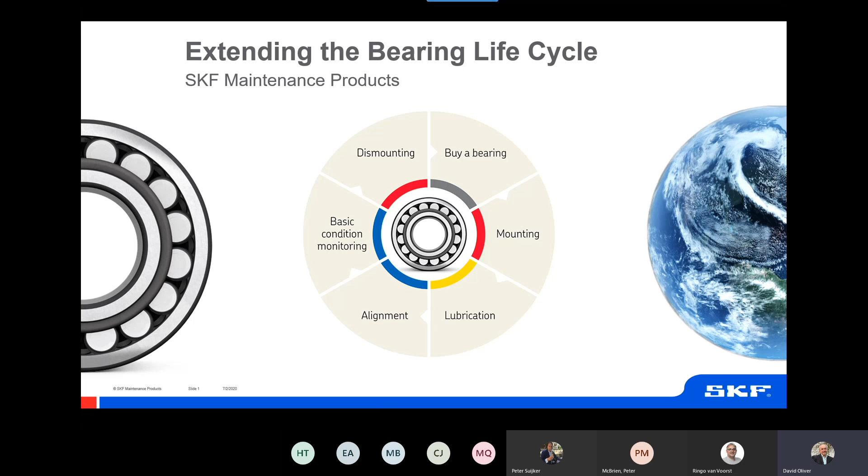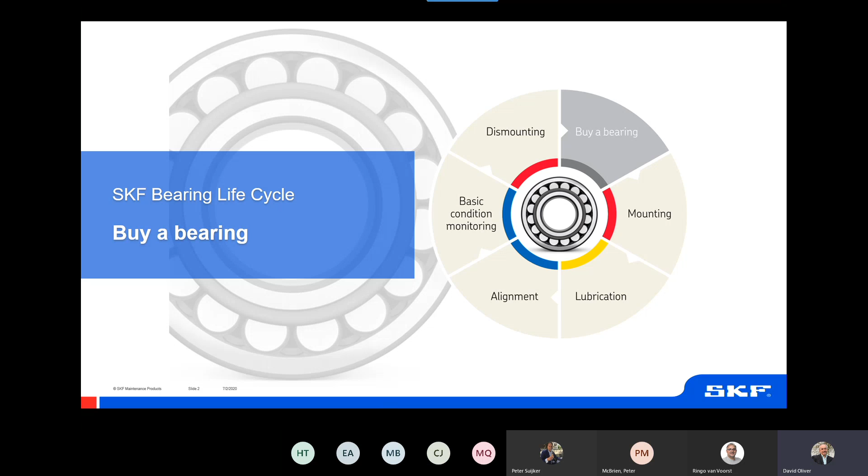So without further ado, we'll begin the presentation today and take you through the various facets which we have put together relating to the life cycle of a bearing. We'll start off with the actual purchasing of the bearing, the buying of the bearing, and you might say, well, that's a very straightforward operation. We go to a distributor, we tell them the bearing we want, and we purchase it.

But today, that is fraught with some difficulties, as some of you might well understand, because we have many issues across our range of products with counterfeit. And we want to draw your attention to this because it's important in terms of the performance of products and what you will achieve by the application of SKF products.

People ask us, how large is the market? Well, it's an illegal activity, so it's very difficult to define the size of the market. However, estimates as much as a few years ago indicate that 20–25% of bearings in China, for example, in retail are counterfeit. We believe the situation may well be slightly worse in, for example, India. And around about 20% of all products sold as SKF in the Middle East, for example, are also likely counterfeit.

So what is the impact of this? And I have just a small case to present to you today. In the UK, authorities with SKF raided a non-authorised SKF bearing distributor and seized around 1 tonne of counterfeit SKF bearings. And the background to this, how did we identify that this particular distributor was selling counterfeit bearings?

Well, we were approached by a member of the public who had purchased a bearing from this particular non-authorised distributor to fit onto his mountain bike. And he was so disappointed by the performance and quality of the bearing that he came directly to SKF complaining that the bearing wasn't fit for purpose, wasn't of good quality. And on further investigation, we identified that the bearing was counterfeit. So that then led us back to the non-authorised distributor and the raid that was made.

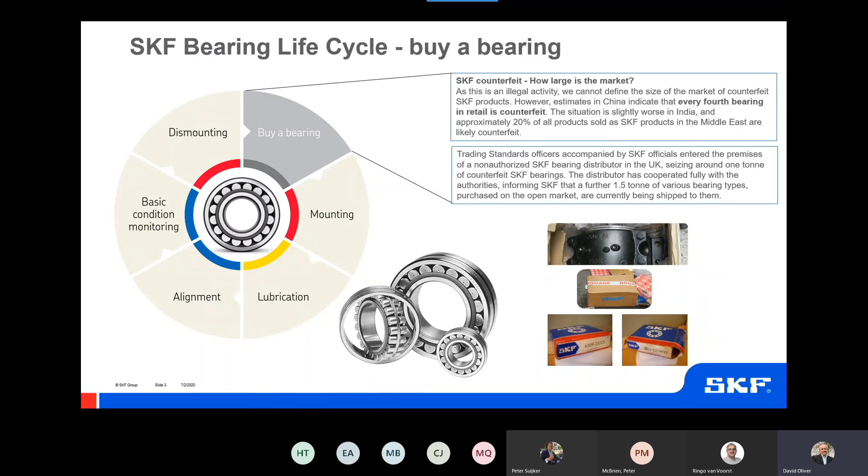So the point to you would be to always use SKF authorised distributors. And if you're not using SKF authorised distributors, ensure that the person you're buying the product from has a route to an authorised SKF distributor. So this is the first area of managing the life cycle of the bearing.

When you buy a bearing, please remember that you're buying a very high precision piece of equipment. So when you receive it, ensure that the packaging is undamaged. If you are storing it, make sure it's stored in a dry area with a constant temperature, not against cold walls or directly onto a cold floor, not adjacent to heating pipes or even in direct sunlight. If you are looking to remove the anti-corrosive film on the bearing, try not to use chemicals to do that because they are by nature solvents and might well affect the lubricant that you apply to the bearing.

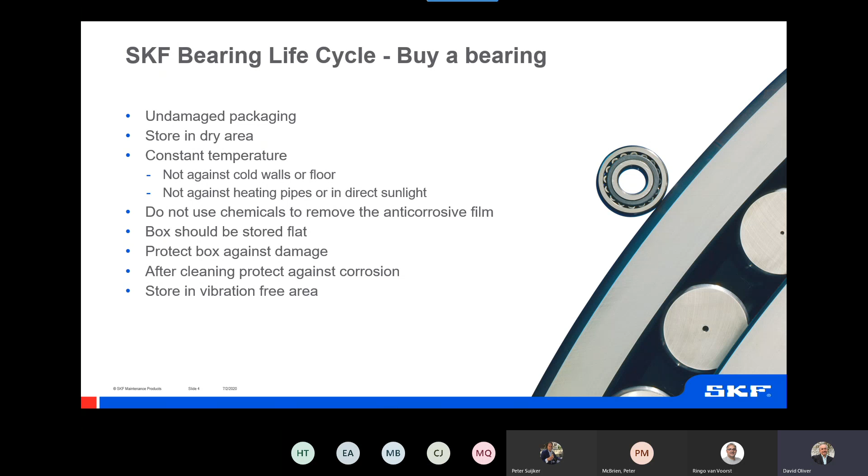If you are storing it for long periods of time, the box should be stored flat, not on end. Larger bearings, thinner section bearings can easily distort under their own weight, so they should be laid flat on any racking. After cleaning, if you're not immediately using the bearing, you need to further protect it against corrosion. And finally, make sure that the product is stored in a vibration-free area to avoid issues later on if the bearing is to be stored for an extended period of time.

After purchasing the bearing, obviously the next step when removing it from storage is the mounting of the bearing. The mounting of the bearing is very important to consider.

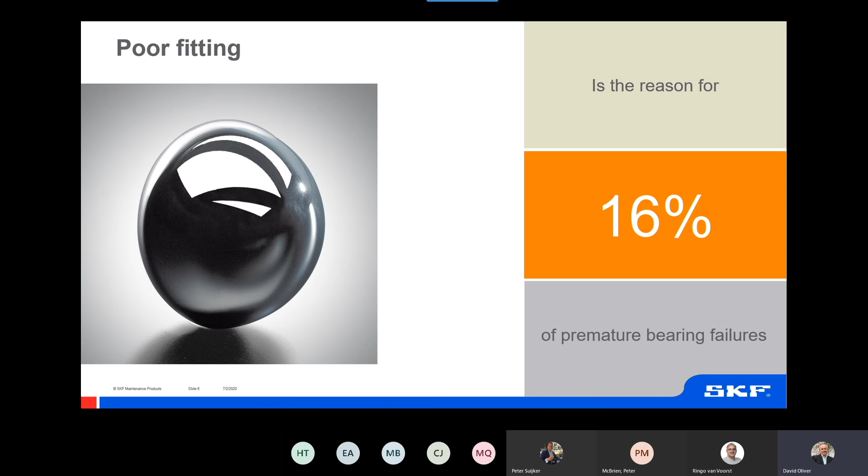It's the reason for over 16% of all premature bearing failures, according to SKF statistics. And the message to you as an audience today is that almost all of these instances are preventable by the use of best practice and the use of the correct tools. And we'll give you some small insights into what that might look like during this material today.

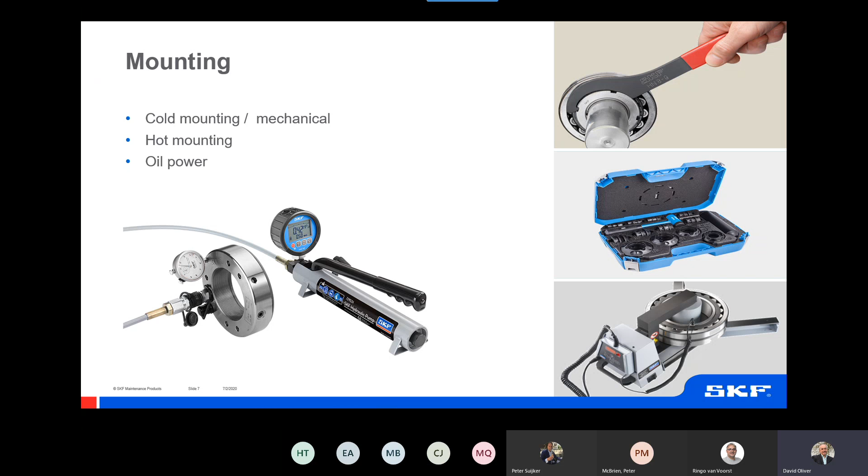The mounting procedure can be done cold, often mechanically. It can be done through the application of heat and sometimes with the use of oil power, hydraulic oil, to facilitate and reduce the mounting forces during the process. Typically, bearings are mounted directly onto a cylindrical bearing seating. If that's cold, then the appropriate fitting tools should be used. And if the application of heat, then good quality SKF induction heaters would be the preferred equipment of choice there.

Sometimes bearings are mounted onto a tapered seating. So this can be directly onto a tapered shaft or onto a variety of sleeves having a tapered outside diameter. So these can be done cold using mechanical fitting tools or sometimes hydraulically. And we would draw your attention to the SKF Drive-up Method when using hydraulics, and we'll touch on this during the next few slides.

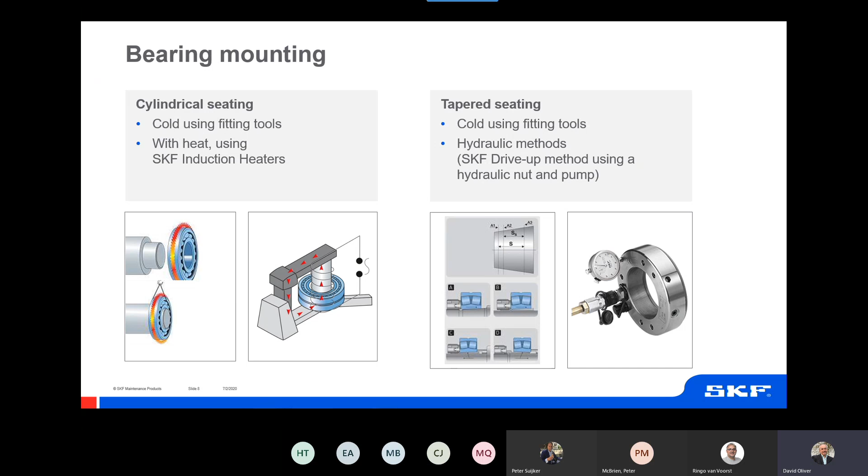The consequences of the various types of mounting: if you're mounting directly onto a cylindrical seating, it's quite simple because everything is ready for you to mount the bearing. The shaft is prepared, the housing is prepared, etc. There's no need for additional measurements in terms of the mounting process. So there's no need necessarily to measure anything on the bearing during the mounting process.

Disadvantages: you can't control the clearance in the bearing. That is dictated largely by the shaft tolerancing, so it's very dependent on tolerances. It's not possible to fine-tune the mounting procedure, so to adjust further the clearance in the bearing during the mounting procedure. Dismounting can be difficult because quite often the fits, particularly on a shaft, will be quite tight. And for very large bearings, hot mounting is impractical simply because of the physical size of the bearing, and mechanical mounting requires quite high forces to be used.

On a tapered seating, the advantages are it's relatively fast and relatively easy to mount and dismount. Quite often we can use hydraulics, which simplify and ease the process. The method can be very controlled. We can get accurate interference fits or clamping forces of split sleeves on the shaft. We can fine-tune the process. We can adjust the clearance in the bearing to maybe take a little more clearance out or add a little bit more clearance in. It facilitates the use of sleeves.

The use of sleeves can often prevent shaft damage should there be a bearing problem because they're quite soft in terms of the material, and it will convert a cylindrical shaft to a tapered seating as well. Disadvantages are that the mounting process can be complex and requires some experience. Measurements will be required. And if you are mounting the bearing directly onto a tapered shaft, the tapered shaft will inevitably cost much more to actually produce.

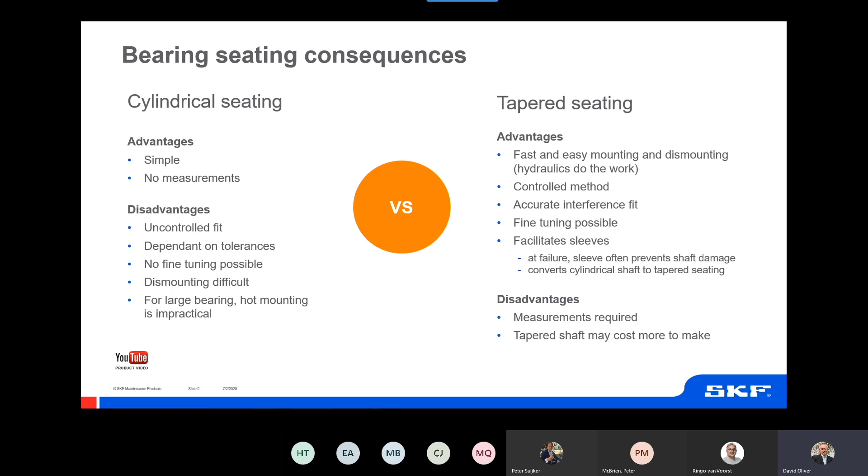For the correct cold mounting of bearings, there are SKF fitting toolkits available to use. The reason that we prescribe these is that if you apply force to the incorrect ring during the mounting procedure, so to the outer ring if you're mounting the inner ring onto a tight shaft fit, or through the inner ring if you're mounting the outer ring into a tight housing fit, all of the considerable mounting forces will be transmitted from ring to ring through the rolling elements, inevitably causing bearing damage.

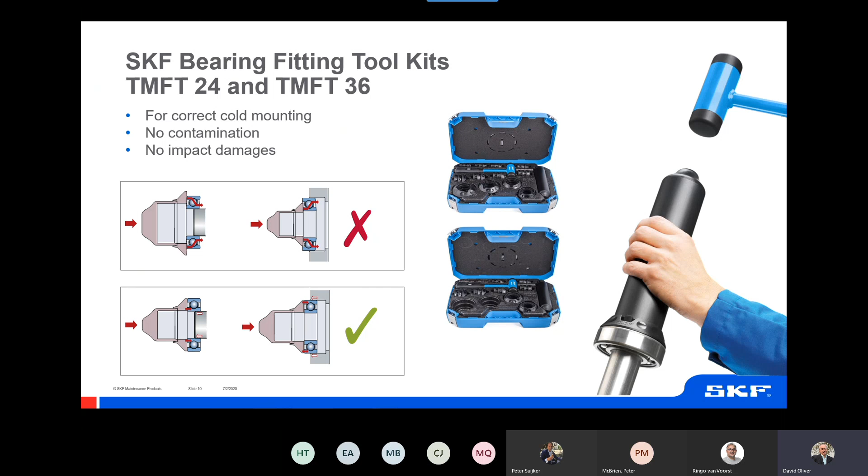If you use the correct SKF mounting kits, then those forces are applied equally over inner and outer rings, distributing the mounting forces across both, and that will reduce damage. Additionally, the impact rings in the kit marry up exactly with the bore and OD of ISO dimension bearings. There is a sleeve for different shaft lengths and different impact rings, and there is a dead blow hammer for safety purposes in the kits as well.

Induction heaters are the preferred method of choice for applying heat to the bearing, and SKF induction heaters are of innovative design, so easy to use, easy to handle. They have fast heating and low energy consumption, so enhanced electronics. They are portable for the smaller sizes, foldable arms to support large diameter bearings, different yokes with storage for the yokes in the smaller units, and even smaller portable units are available now as well.

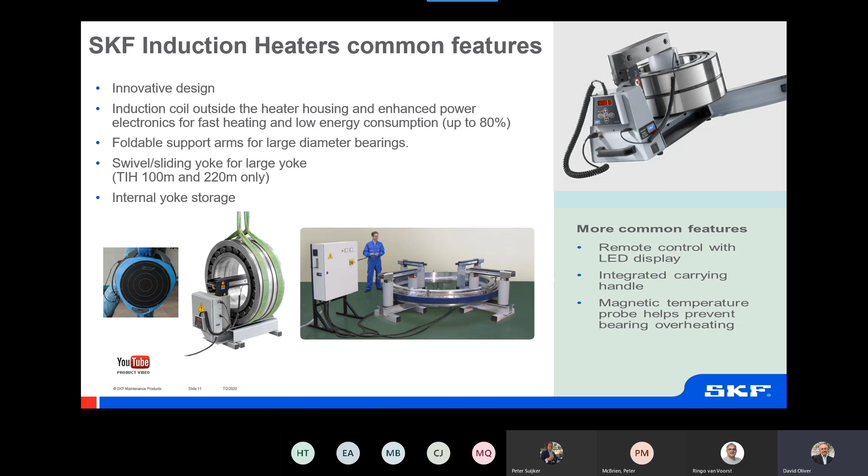All will have remote control with LED display, an integrated carrying handle and a magnetic temperature probe to prevent bearing overheating. There is a supporting chart to select the induction heater that might be required. There's also an online tool for heater selection as well. So on the vertical axis here, you see the outside diameter of the bearing, and on the horizontal axis, the weight of the bearing.

So depending on the size and the weight, it will dictate which induction heater is required. The image to the right-hand side here shows you the latest introduction to the SKF induction heater range, which is the truly portable induction heater, TWIM 15. And this, as I say, can be taken to the job. It can be 110 or 230 volts.

It will take a bearing weight up to 20 kilograms or 44 pounds with an outside diameter of 320 millimeters or just over 12 inches. So it will take a wide range of bearings. We'll be able to heat a wide range of bearings and can be taken to the job to do the heating process.

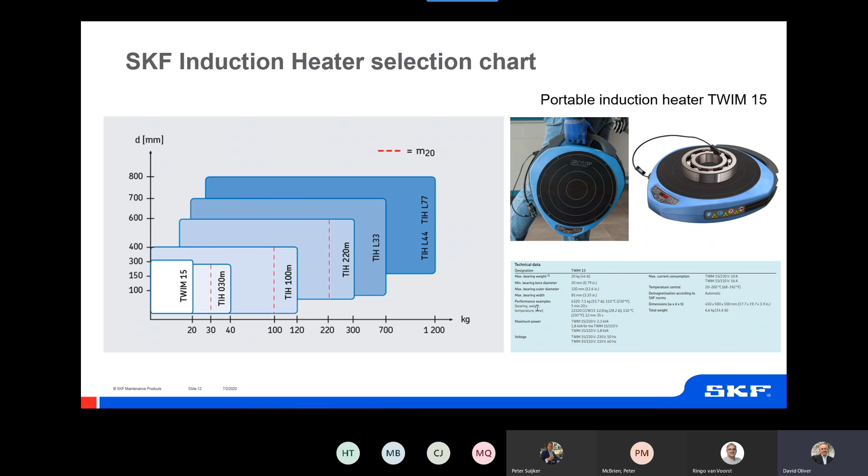What we'll be trying to avoid in the use of induction heaters, well, we want to have customers or users avoid using open flames, so almost impossible to control the heat in such instances and almost certainly cause localized damage to the bearing. The use of oil baths, which have a health and safety issue, very hot oil being used. Quite often the oil isn't clean, so it's very, very dirty as well. And the temperature in those also is not often controlled.

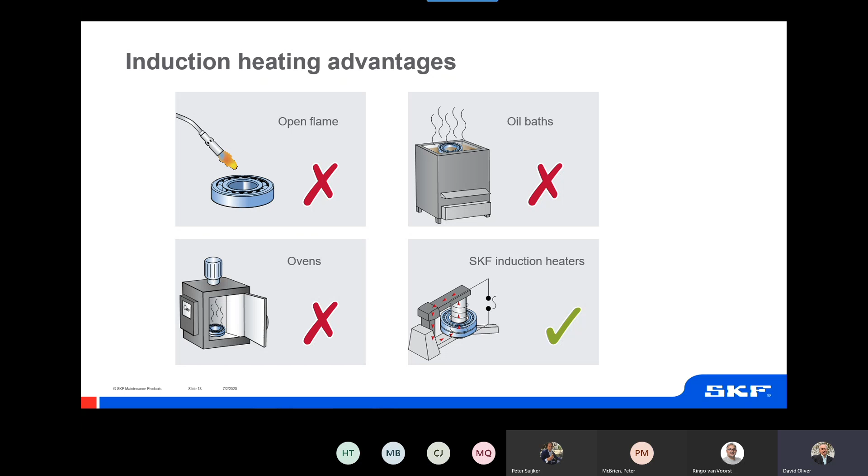Ovens, again, temperature control, very, very difficult in ovens. Fume extraction, not always there as well. So much the best way and the optimum way is by the use of SKF induction heaters.

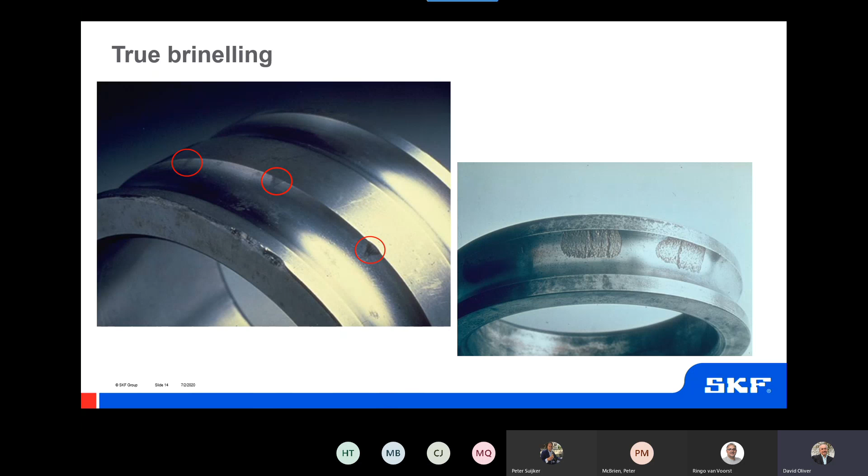If we use incorrect methods, if we apply these mounting forces across the ring as described in previous slides, you will see highlighted in red here indentations where the rolling elements have been jammed against the raceway groove of this double row bearing. If this bearing were to be further used, to be mounted and used in application, then the image to the right here shows you typically how the damage might propagate. So rough, uneven, noisy operation would be as a minimum what you would find, but inevitable premature bearing failure would be the end result of the indentations generated by a faulty mounting procedure.

When mounting bearings onto a tapered shaft or onto a sleeve, we would recommend to consider using the SKF Drive-up Method. This is unique to SKF and actually features the use of critically two pieces of information which are published by SKF for each bearing. So it would involve the use of a hydraulic nut, a hydraulic pump, and an SKF pressure gauge, which is very accurate to low pressure.

The reason it needs to be very accurate to low pressure is that the initial published pressure is very, very low to properly seat the bearing onto its sleeve or onto the shaft. And that is the start position for the drive-up technique. SKF hydraulic nuts are drilled through so that the dial test indicator can be located directly against the piston on the hydraulic nut. So the drive-up distance can be very, very accurately measured. And the drive-up distance is also published for each bearing by SKF.

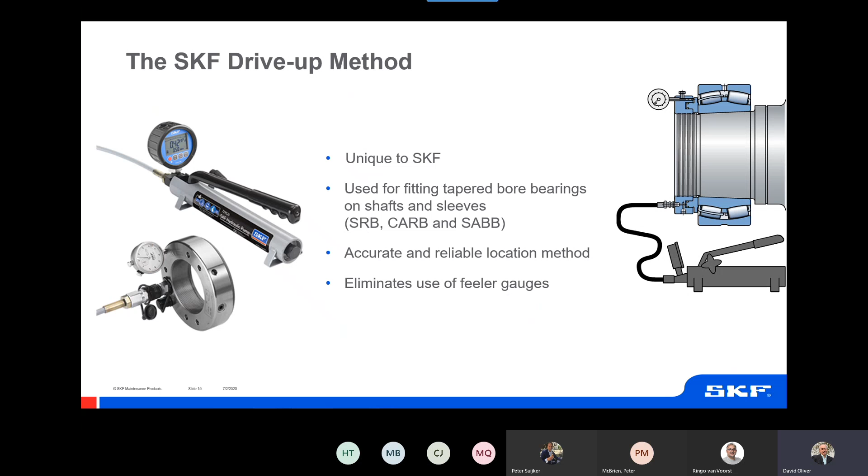So it provides an accurate and reliable location method, very safe to use, and eliminates the quite subjective use of feeler gauges in the mounting procedure and the measurement of the reduction in clearance when typically mounting these bearings.

And this is just a small case study from a customer in the food and beverage industry. These are flour milling devices. This particular customer had multiples of these throughout the facility. He was having to do frequent bearing changes due to roll regrinds. The mounting procedure, as described, was difficult, requiring some skill and experience. And in this particular facility, they only had one person that could do this mounting procedure. They typically had poor repeatability of the mounting and generally, because it was one person, lacked the requisite skills.

So we talked to this customer about the use of SKF Explorer spherical roller bearings and introduced the hydraulic mounting drive-up technique. And what the customer immediately saw was improved reliability in his mounted bearings, much better accuracy and repeatability of the bearing mounting. He significantly reduced the amount of time it took to mount each bearing as well, which was a big saving for him. And he was able to use a documented mounting procedure using published SKF data.

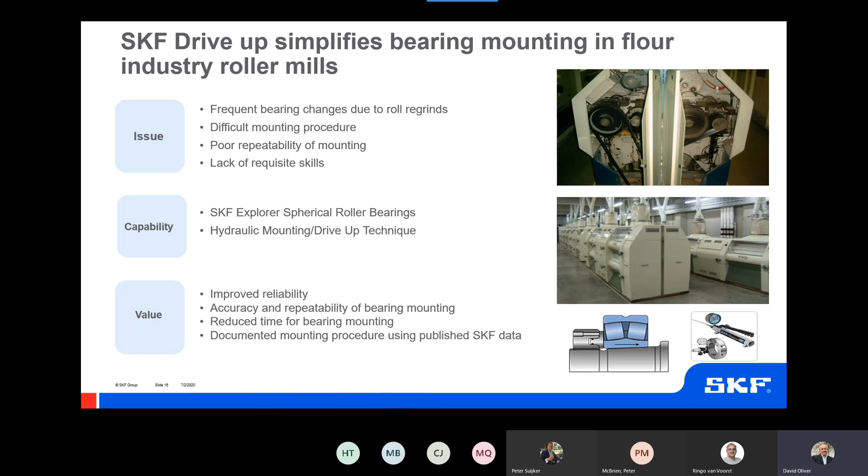And that documented mounting procedure could be used by many technicians across the organisation, not just one skilled technician. So a big cost saving and benefit to this particular customer, and hopefully illustrative of the benefit of this technology.

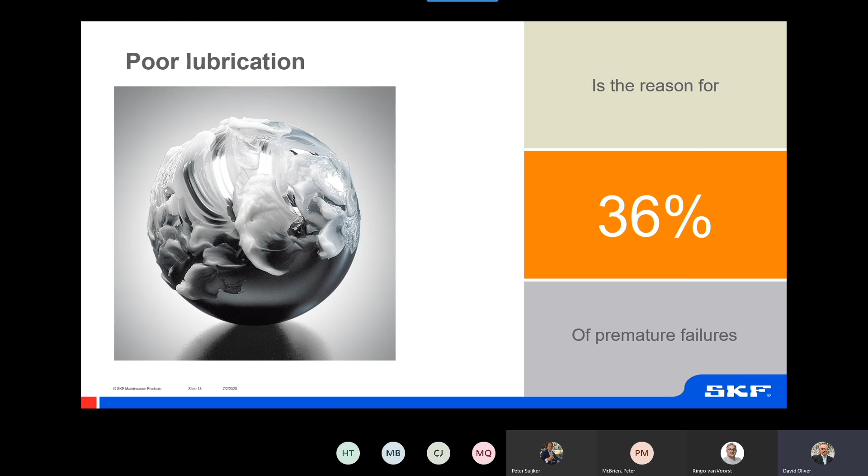We now move on to the lubrication of the bearing. And again, this is important because over a third of all premature bearing failures are down to poor lubrication. We see issues due to incorrect re-lubrication intervals, which generates undergreasing or overgreasing. We see incorrect lubricant selection, the use of poor quality lubricants or a lubricant type that is unsuitable for the parameters of the application.

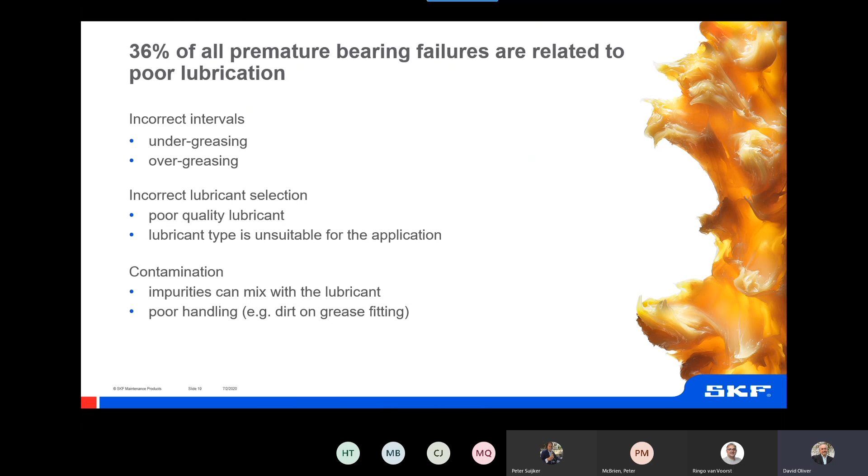We see the potential introduction of contaminants, so impurities, whether liquid or solid, can mix with the lubricant, impairing its function. And poor handling can easily introduce dirt or grease during the mounting procedure for bearings as well.

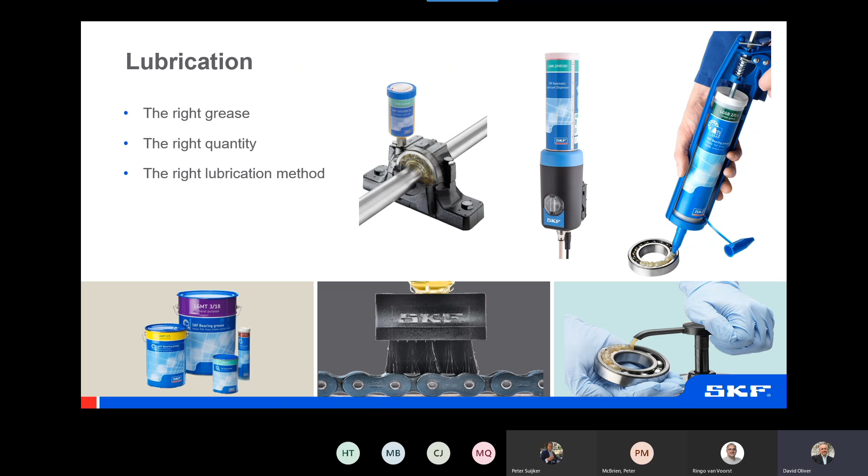Lubrication is about many things, but some of the key ones are having the right grease applied in the right quantity via the correct method, which will protect the bearing and protect the process. So we see, as we've highlighted already, people making the wrong lubricant choice. If people use the wrong lubricant, it introduces problems, and when people see problems, they lubricate more, which exacerbates the problem.

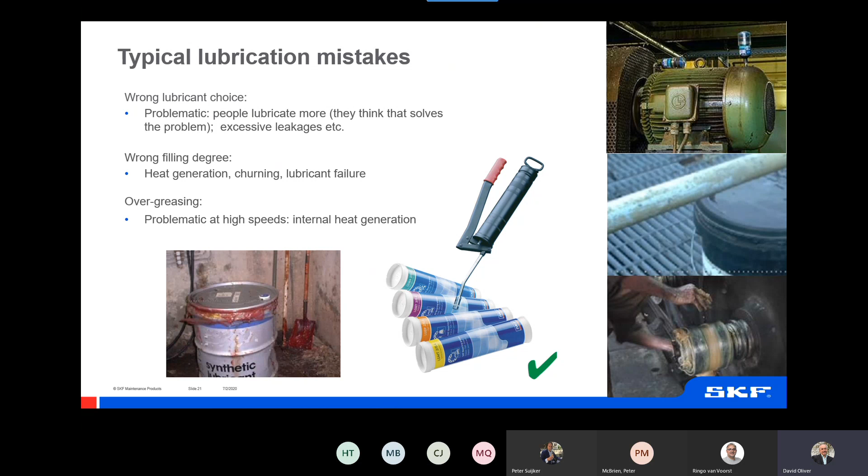The wrong filling degree, so they put too much grease in the bearing or in the space surrounding the bearing. That leads to churning, extra friction, heat generation, and again, that leads to a more rapid deterioration of the grease in the bearing, prompting potential early failure. Overgreasing is problematic, particularly for high-speed applications, and again, down to internal heat generation. So the use of the correct grease with the correct tools is very, very important.

SKF have a range of bearing greases which are designed to be suitable for particular conditions and particular operating parameters. It's a high-quality grease for bearing lubrication. It's of consistent quality. There's a complete product program for both general and very specific bearing lubrication requirements.

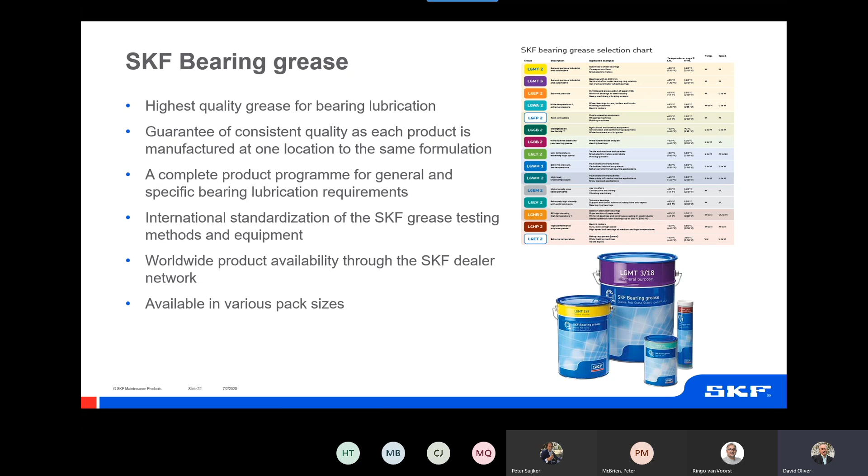A lot of international testing of bearing greases are done on proprietary SKF equipment anyway. So all of SKF greases are tested for specific functions and meet international standards for their use as well. Worldwide availability through SKF Direct and through the SKF Authorized Distribution Network, and available in a range of different pack sizes as well.

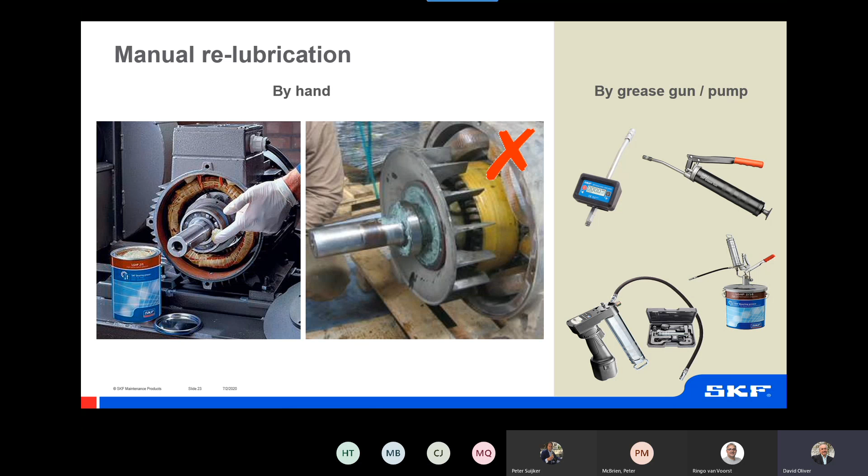Often re-lubrication has to be done manually, sometimes by hand, but again we would advise and urge the use of the right equipment and the right lubricants, the right quality lubricants in this procedure. Many different grease pumps can be used which add value. You can use a method for actually controlling the amount of grease that's discharged from a grease gun, for example. If you're lubricating large bearings, there are battery operated grease guns which can deliver larger volumes of grease very, very quickly as well. So be mindful of the requirements for manual re-lubrication and the items of kit that will be available to support you in that process as well.

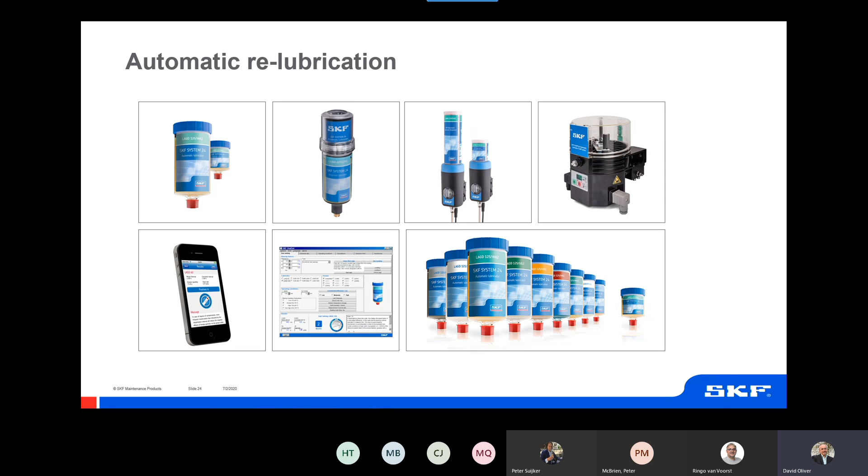What are the advantages of automatic lubrication? Well, it significantly controls and minimises the amount of grease consumption. It reduces leakage and spillage. It reduces contamination risk. It takes away many of the areas where human error can become a problem, and through all of these will limit and reduce the number of failures of products seen.

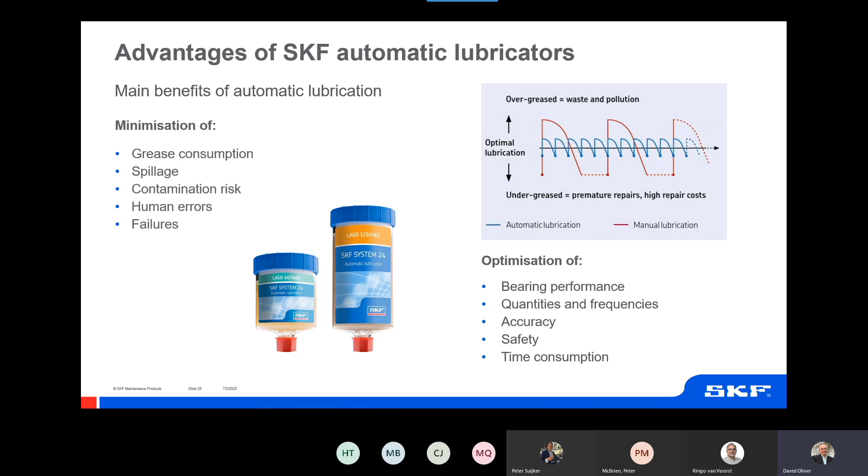We're also now starting to introduce, for our customers that have a service contract, wirelessly monitored automatic lubricators. So these are very simple to set up and install, will further increase personal safety, will facilitate the remote monitoring of the lubricator status, and are very flexible and scalable in terms of an overall lubrication solution.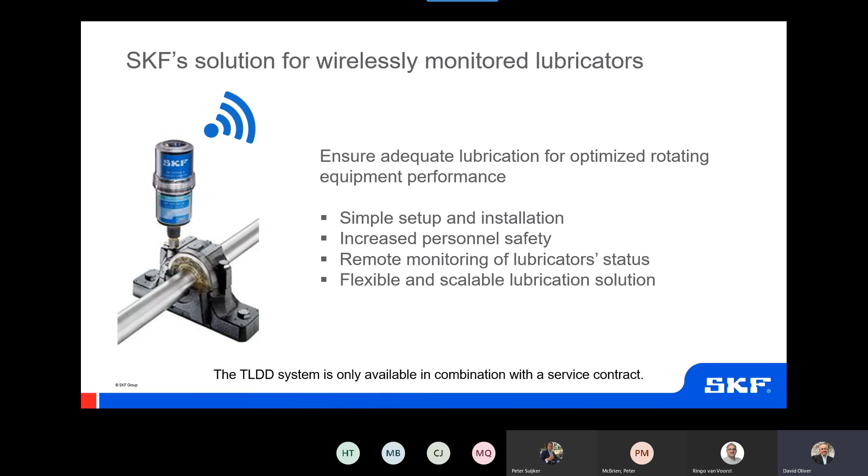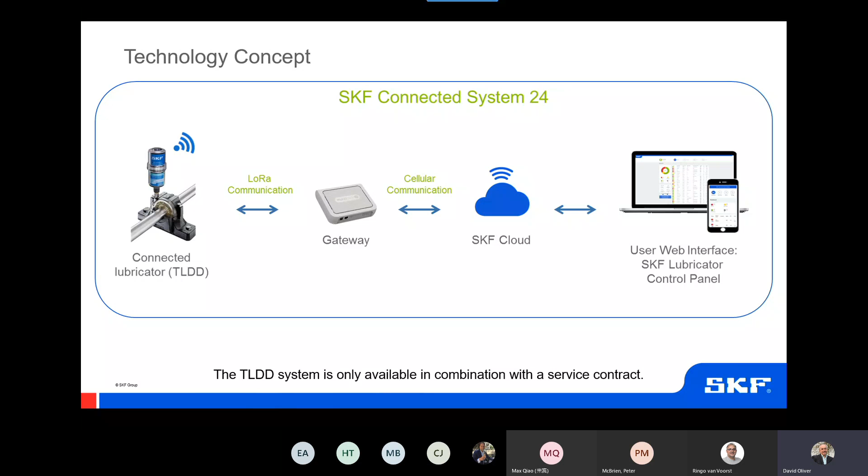Without going into a lot of detail, the automatic lubricator will be connected through a gateway to SKF Cloud, and then that can be accessed through an interface or a lubricator control panel, which will give the operator information on the condition of the lubricator, the fill of the lubricator, whether it needs to be changed, etc. So from a remote desk, the whole system of automatic lubricators can be managed. This is a recent addition to the range.

And the consequences of over-greasing, we see it all the time.

Anybody that's involved in maintenance, that has access to machinery, that is involved in the re-lubrication process, will have seen images such as the one that you see here in front of you, where this particular set of shaft bearings on shafts was lubricated via a bunch of grease nipples on a panel, so the bearings couldn't be seen by the re-lubricating technician. So over-lubrication was a big problem here, and the condition of the grease was a big problem in this particular facility as well.

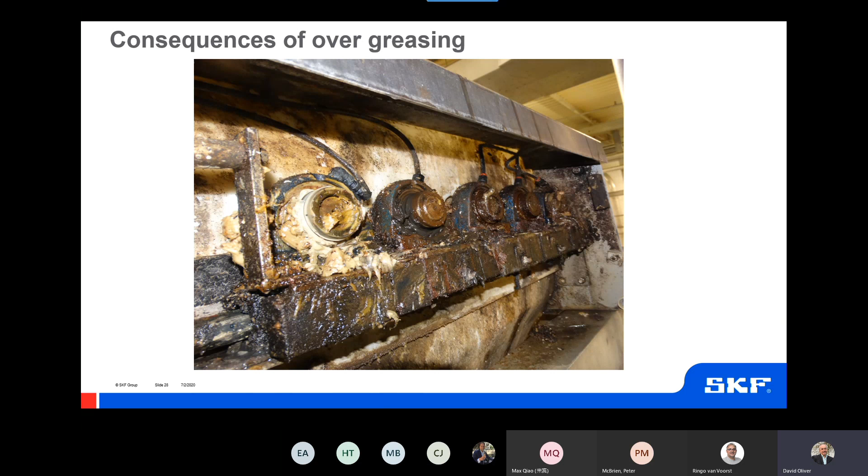So this is the potential consequence, and reliability is clearly the end consequence of this, or poor reliability. If you have a lubrication issue in a bearing, we typically see a very high glaze on a raceway surface, and that's because the damage is very, very localized in the first instance to the surface of the material, what we call fine-grained spalling or almost a polishing of the surface.

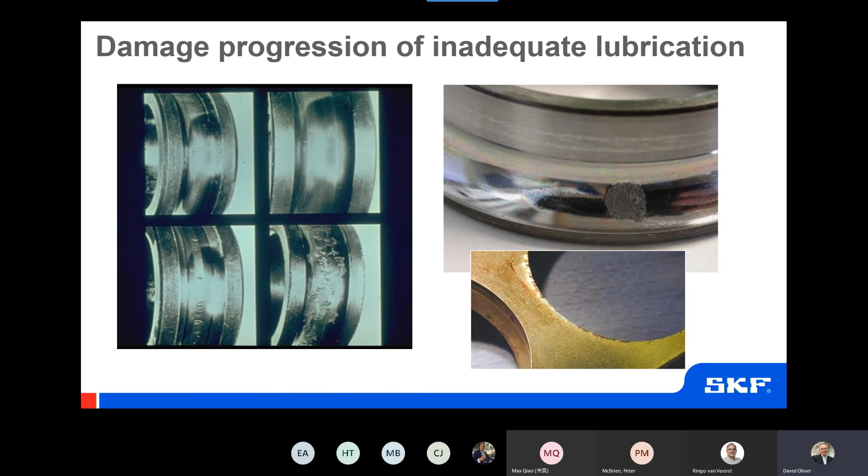The cage tends to suffer, particularly metal cages, very, very early in the process, because they do rely on a good lubricant to protect the cage surface from contact with the rolling element. So if there's poor lubricant, we often see wear, particularly in metallic cages. But ultimately, this will progress, as in the slides to the left-hand side, from the glazing and polishing through to a more advanced failure over a relatively short period of time if the lubricant is imperfect in any way.

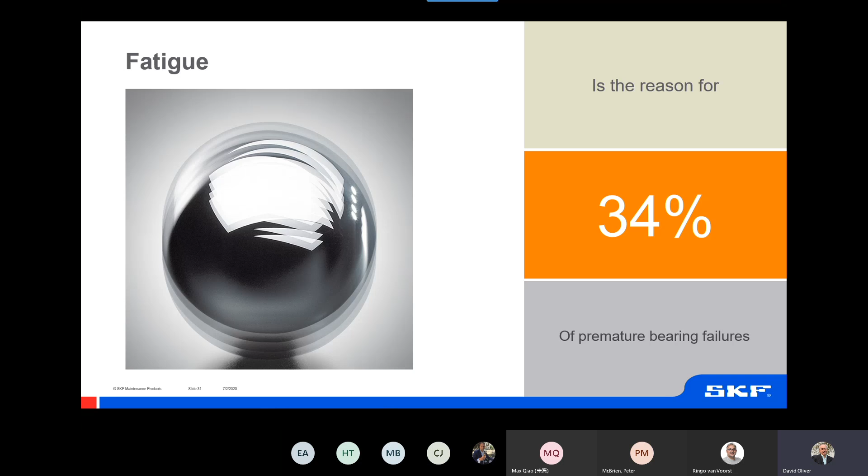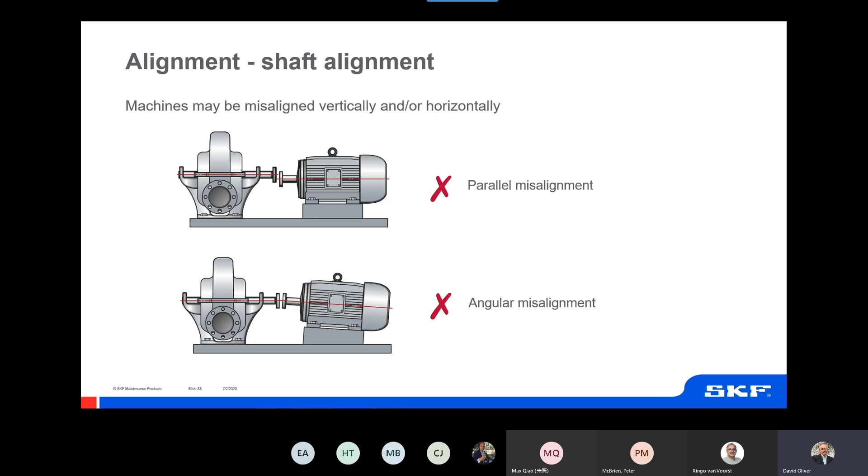So we now want to look at alignments. We look at fatigue as a failure mode for bearings, and again, over a third of premature bearing failures can be associated to fatigue or high load or excessive load. Statistics tell us that around 50% of all costs related to breakdowns of machines with rotating shafts are caused by misalignment. We see different types of misalignment: parallel, where the shafts are out of line to each other, or angular, where the shafts are misaligned to each other in shaft-to-shaft installations.

The consequences of that are obviously failure, unplanned machine stops, which are caused by excessive wear on things like couplings, pulleys, belts, etc. They will introduce extra friction, which is obviously energy. You will have high vibrations, higher noise. It will impact bearing life. It will impact other component life around the bearing as well. And as said, result in unplanned machine stops.

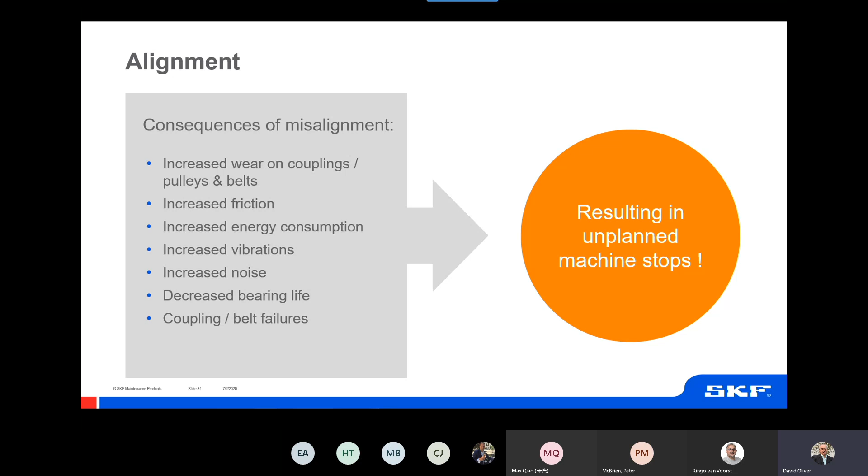Typical alignment processes that we see: straight edges or by eye. This is very, very inaccurate, but very quick to do, very easy to do. We see more sophisticated methods by the use of clocks. So this can be very accurate, but is actually a very, very slow process and very difficult to do, requires some training, some experience. But the use of laser shaft alignment equipment is typically relatively quick to do, relatively easy to do, and very, very accurate. So formal SKF laser shaft alignment equipment should be considered where you have shaft-to-shaft equipment.

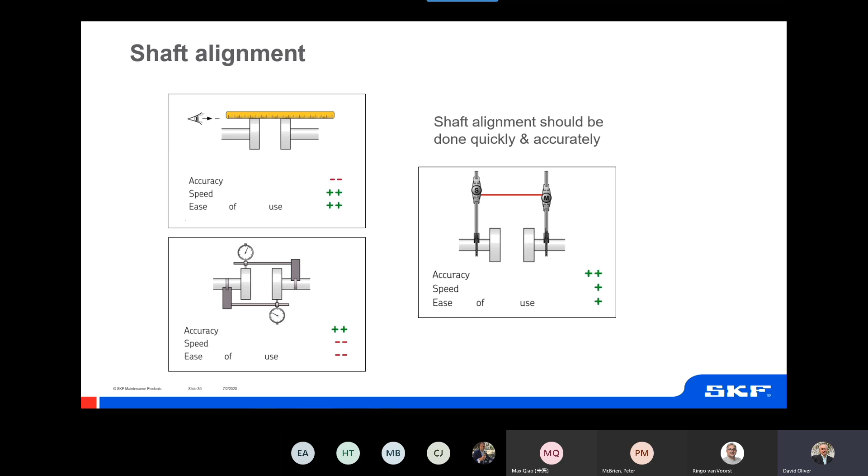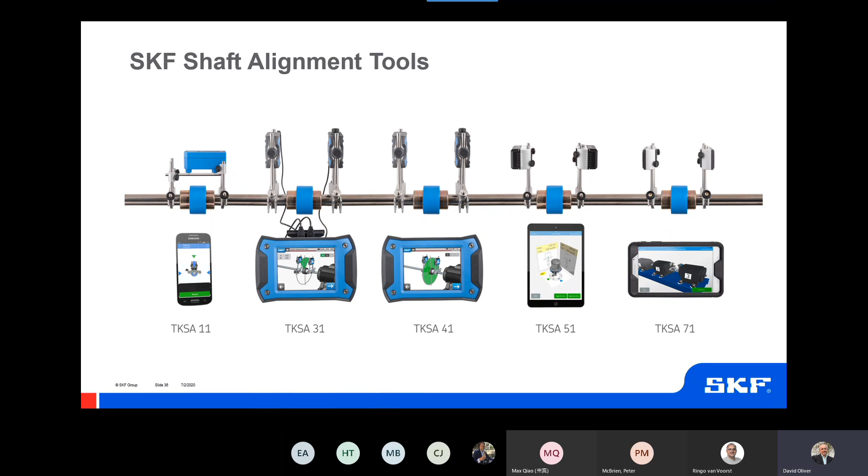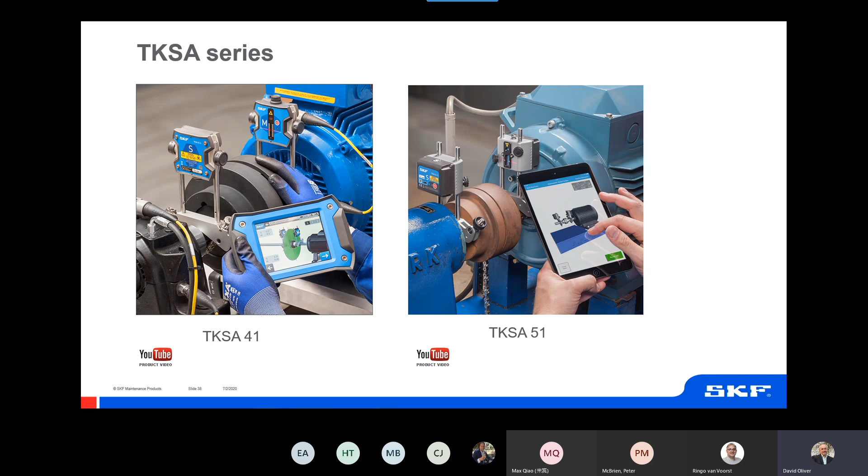There are several products within the range of SKF shaft alignment tools, from the simple phone app-based systems through to more sophisticated multiple shaft systems. And the selection of these really depends on need. But as can be seen in these slides, there are many different types of alignment process. I would also add at this point that many of these are supported by YouTube videos which illustrate the use of them, but the app will guide you very easily through the process, very user-friendly. Free apps available to download where there's not a tablet supplied with the mounting equipment.

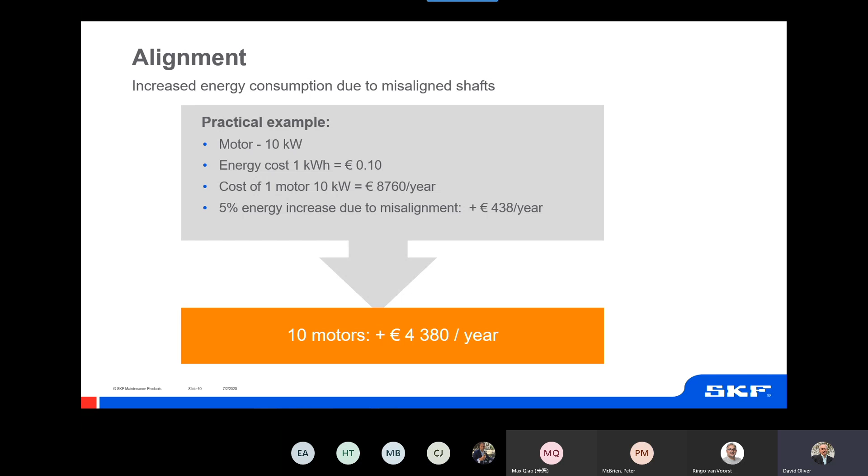Just a simple practical example: if you have a 10 kilowatt motor, and if we have an energy cost of 0.1 currency units per kilowatt hour, the cost of that one motor will be getting on for 9,000 currency units per year. As a conservative estimate, misalignment can certainly introduce a 5% energy increase. That will result in approaching 450 currency units per year. And if you have 10 motors operating, without any consideration of reliability of the units, you have approaching 4,500 currency units per year as a pure energy cost if alignment is not good in these applications.

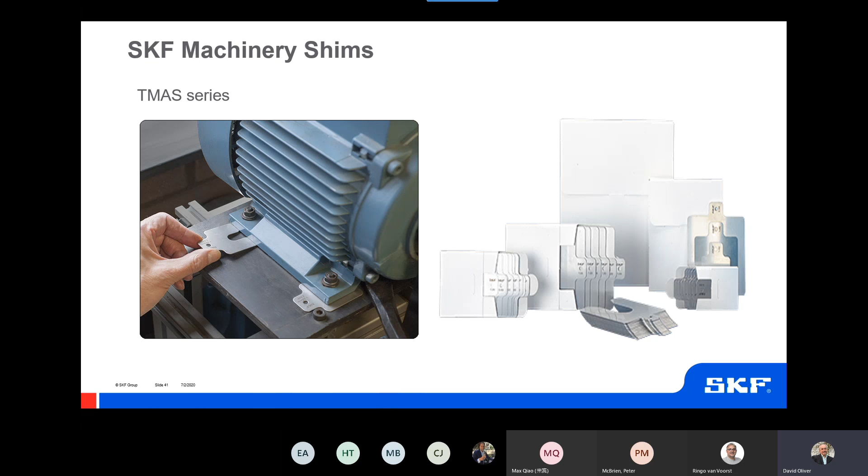What the output of the laser alignment process will be is to tell you what shims are needed or what elevation is needed at various motor foot points and pump foot points, etc. The use of pre-machined shims is very helpful in this process to avoid the practicality of having to cut shims locally to the mounting job. There's a range of SKF Machinery Shim kits available to you, which are very practical and very helpful in this particular process.

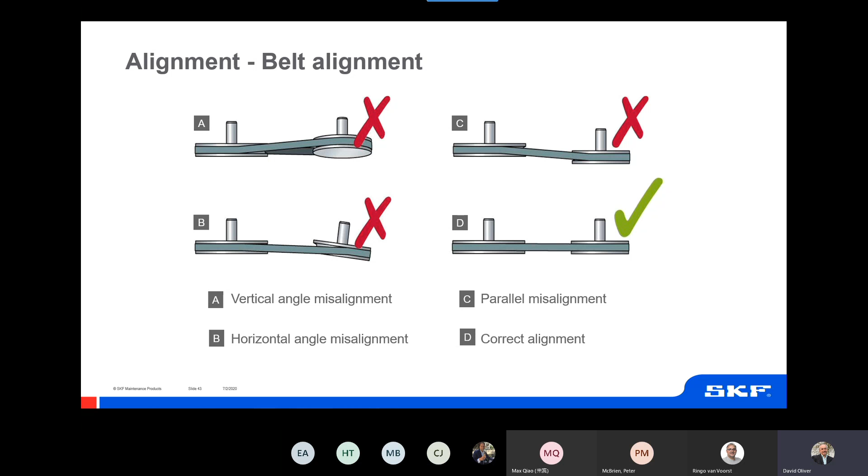We should also consider belt alignment, because this also introduces problems. We see vertical misalignment, horizontal, out of parallel, and it's very simple to get the correct alignment equipment. So SKF have 3 simple belt alignment tools, very easy to use, very practical to use. 2 face-mounted units for different ranges, different pulley centres, and then a system for up to 6 meters where the laser alignment equipment actually fits into the pulley groove. So you get groove to groove alignment.

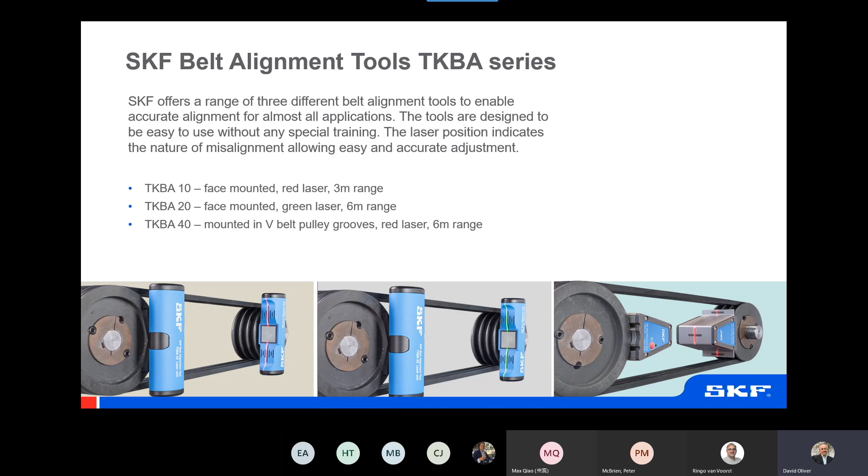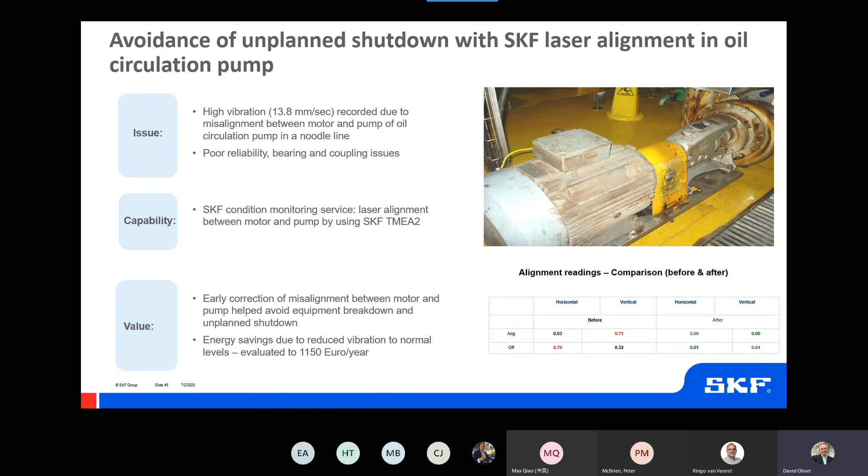So incredibly accurate pulley alignment with these belt alignment tools. Just a couple of case studies where we have customers. So in a shaft to shaft system, a customer was seeing high vibration. That was identified with some condition monitoring work with SKF as being due to misalignment, and it was resulting in poor reliability and bearing and coupling issues. So this was corrected, and that introduced a number of benefits: reduced noise, reduced vibration, reduced temperature, but an energy saving, which the customer calculated to over €1,000 a year in this particular installation.

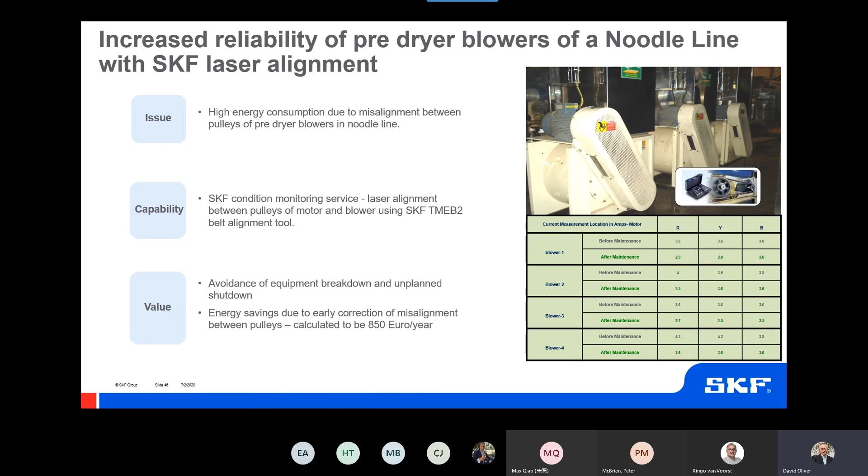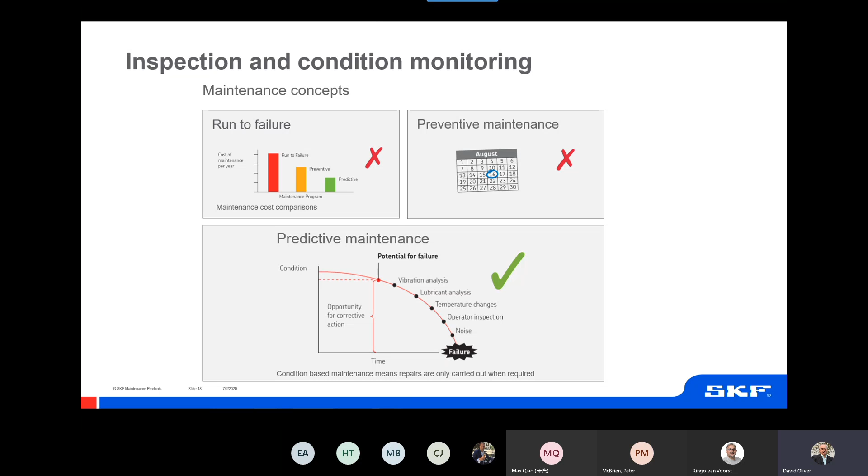Then we come to basic condition monitoring. It's very important to understand the condition of your bearing, of your asset throughout its life, so you can best manage any things that are starting to change in terms of the signature of the machine. And some people still have a run to failure strategy, that they're happy to see assets run until they fail and they change them. Some people move to more preventative, perhaps time-based maintenance, where they try and change product before they think that it will fail. But much the best way and the most effective maintenance strategy is predictive maintenance. So where you're trying to identify changes in the machine over its life, so you can react very early to changes in condition, to deterioration of maybe the bearings in a machine.

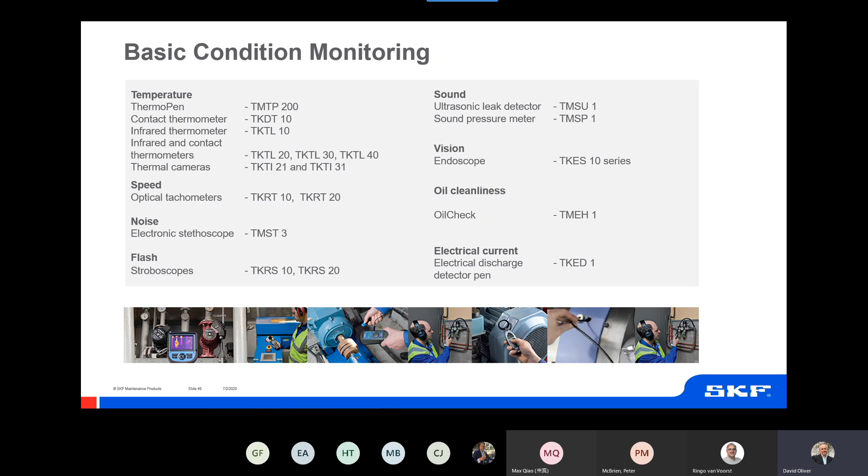There are many ways of identifying changes in condition or the actual condition of a machine. So we can do it by temperature, via speed, via noise, via light flashes through stroboscopes, through detection of sound, visual elements through endoscopes, oil checks, cleanliness, electrical current measurements. We see a lot of issues with current discharge now with the use of speed control in electrical motors.

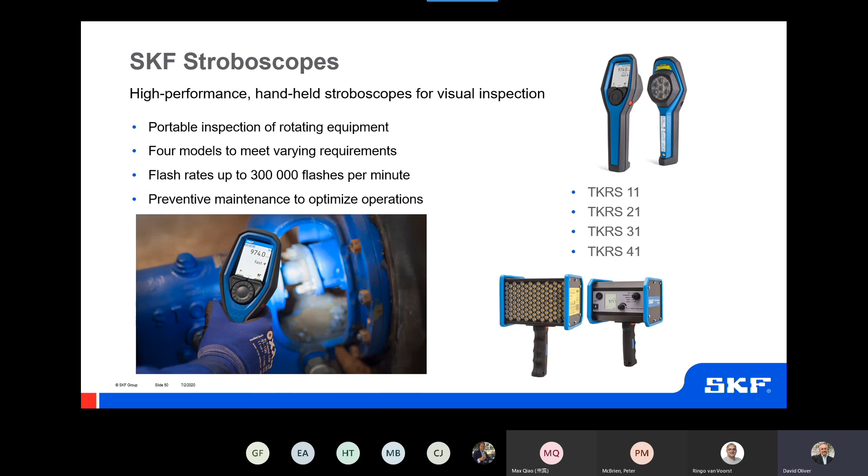Stroboscopes, this is a recently improved range from SKF. We believe that this is probably one of the most underutilised condition monitoring devices used on machinery. You can effectively freeze a rotating piece of kit, whether that be maybe a chain drive, a pulley drive, a coupling, allowing the portable inspection of rotating equipment. So a range to meet various requirements, various flash rates, but a good preventative maintenance technique to help optimise your operations.

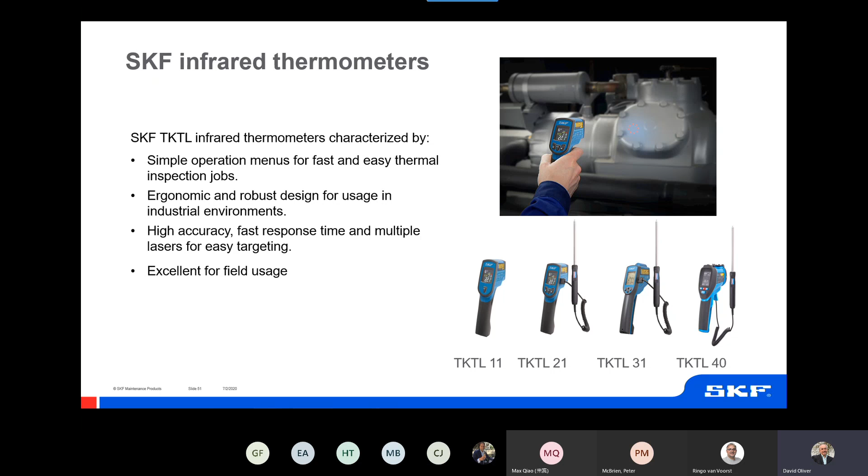Temperature control is always a good method of establishing machine condition or trending machine condition. So a new range of upgraded infrared thermometers from SKF, simple operation, good menus for fast and easy inspection, ergonomic and very robust design for usage in industrial environments, very high accuracy, very fast, with multiple lasers for easy targeting. So basically excellent machines for field usage.

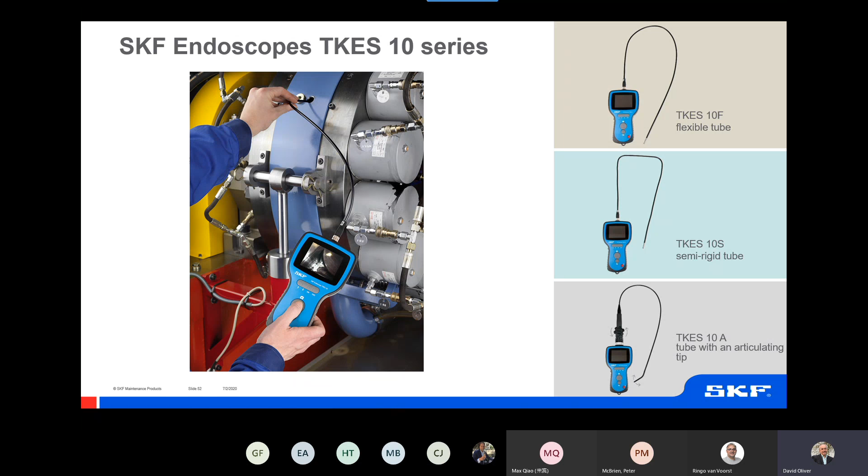The use of endoscopes with various tubes enables potentially the internal inspection of machines, maybe gearboxes or such machines. This is a case study for a snack food producer whereby they were having product failures, and when they had a product failure, they had to inspect the machine quite closely to see whether there had been any contamination of the food lines. So we worked with the customer and introduced endoscopes. This enabled them to do inspections without removing inline equipment, guarding, etc.

They were actually previously stopping assets on average about 12 times a year and taking on average 2 hours for each stoppage to check the machine, so production was stopped. So the value of using the endoscope was eliminating, in many cases, the need to remove guards and inline equipment, removing these 12 incidences taking 2 hours, and that time was reduced to about half an hour. So savings just purely in terms of the availability of the asset of £26,000 sterling every year.

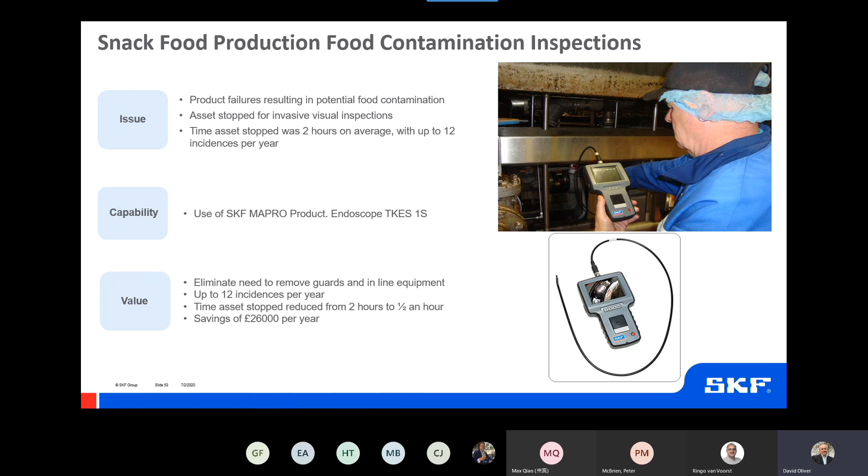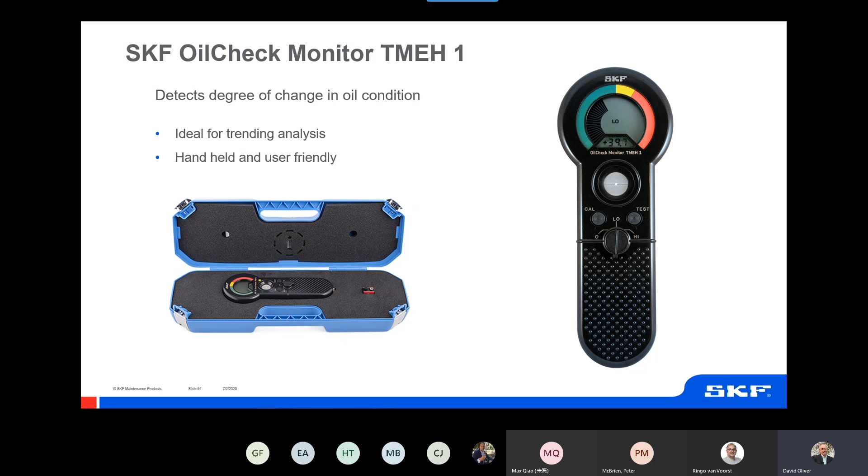Oil checks. We have typically in production plants a lot of gearboxes or shaft-mounted gearboxes, maybe other gearboxes. Typically, to check the oil, we take samples, send them away to third parties for checking on condition, which can be expensive. So this device is an ability to check the condition of your used oil against a brand new sample. So it's a comparative device calibrated with new oil and then checked against a used sample, measures the dielectric constant or the amount of contamination in the oil. So this would be ideal for trending oil. And when perhaps the reading gets into the yellow or red, then you can send the sample away for inspection, significantly reducing cost of oil sampling potentially.

And finally, dismounting. Well, why is dismounting important?

Well, for safety purposes, for the speed of doing it, because an asset is unavailable while you're doing the dismounting and then the remounting process. You don't want to damage adjacent housings or shafts because they would then have to be repaired, introducing more cost and taking more time. Sometimes you don't want to damage the bearing. On larger machines, you might sometimes want to dismount the bearing with the intention of remanufacturing or repairing it, which is often used today.

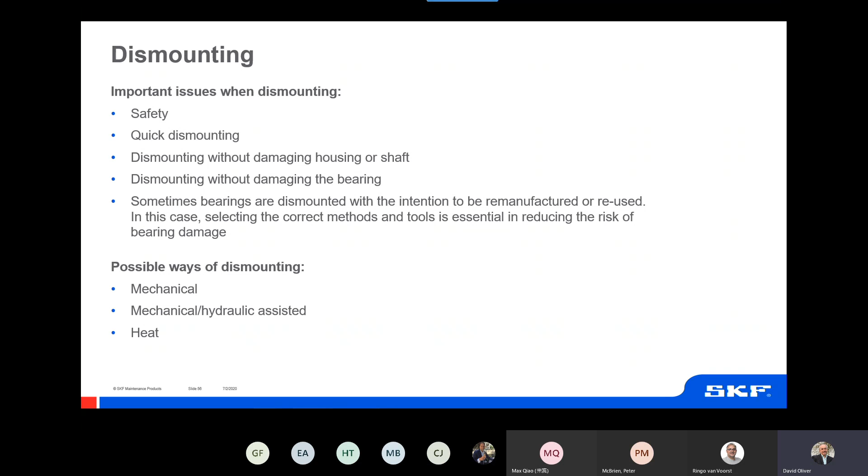And again, as with mounting, we have mechanical, hydraulically assisted, or the application of heat to dismount bearings. A wide range of pullers for all sorts of applications, external pulling, internal pulling, even blind hole pulling, so that they're easy to use, user-friendly, ergonomic designs. They reduce the risk of damage to associated equipment, sturdy, robust designs, as you would understand the need in the dismounting process.

I would draw your attention at this point as well to skf.com/mount. This is a free to access online tool whereby you can input a bearing reference, and it will give you a full procedure for both the mounting and the dismounting of the bearing, along with links to the correct tooling that should be used in this process as well. Many users and technicians really like that, and this is printable. So many people will print this off and literally use it as a standard job plan for the mounting or the dismounting of the bearing.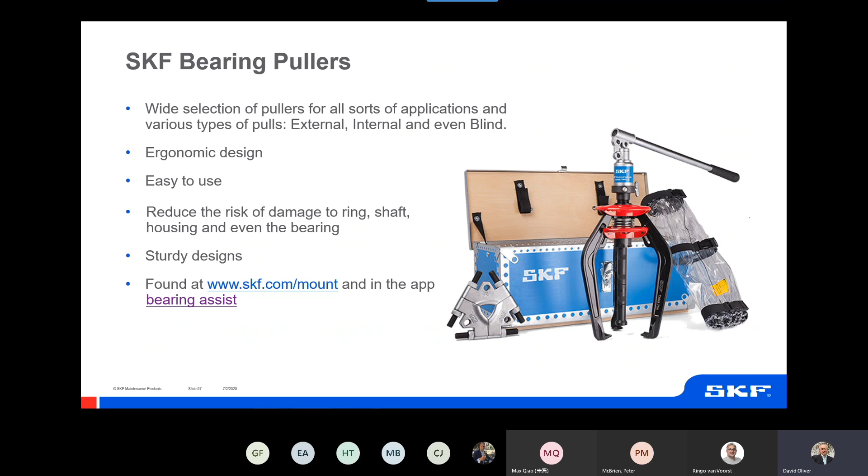We're recently starting to introduce this also in an app form, so it can be taken to the job on a mobile phone or a tablet. It's SKF Bearing Assist. It has a facility that you can read the barcode off an SKF bearing box. You can input a bearing reference into the app, and whilst you're at the job, it will give you the mounting procedure, information about the bearing, and many more helpful aids to the recording of the mounting procedure and the sharing of it with colleagues as well. So I urge you to follow the link in this material to take a closer look at Bearing Assist as well.

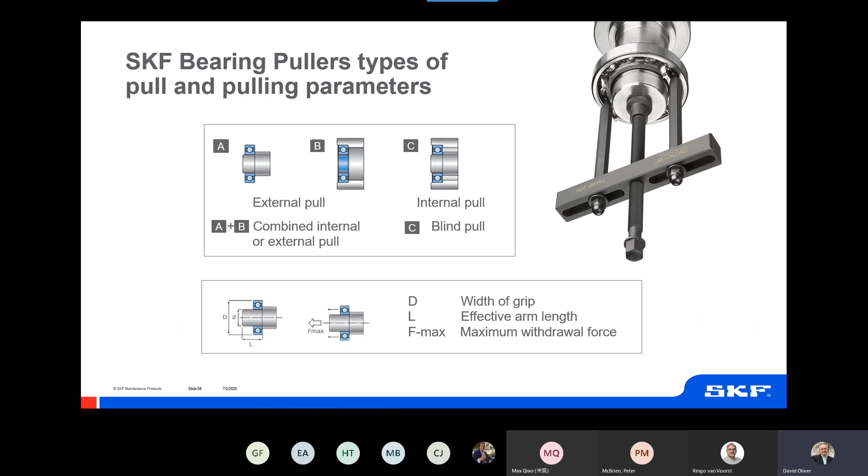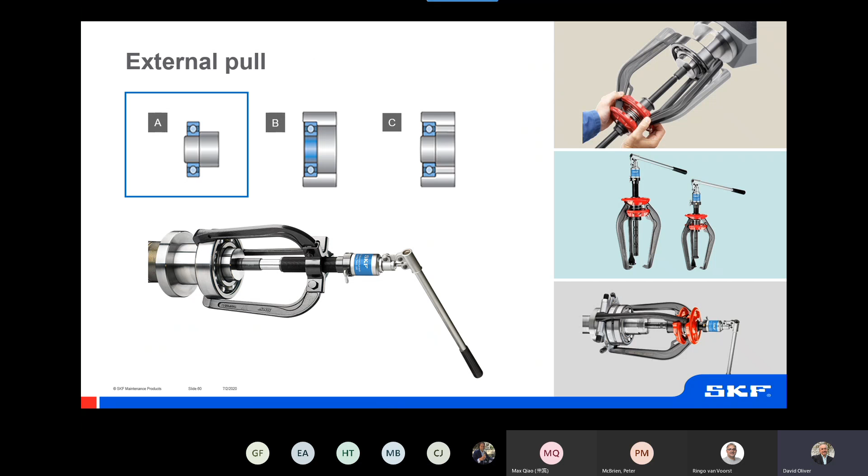So as we've said, external pull, internal pull, some things you need to consider when you're looking at what puller to use: the width of grip, the effective arm length, and the amount of withdrawal force that might be required. A range of different types of pullers are available in kits as well from SKF. For an external pull, these are typically arm pullers. The image to the right shows an ergonomic design where there's a spring, so you can extend the legs, offer them over the bearing, release the spring, and it closes the legs behind the bearing. These can be hydraulically assisted to significantly increase the force without the need for the mechanical actions as well.

If you have access to the bore of the bearing but not the outside diameter, there are other kits available to you. This one features a collet, which can be inserted through the inner ring of the bearing to behind the bearing. It's then expanded, so through impact you can pull the bearing out of a hole if you have access to the bore of the bearing.

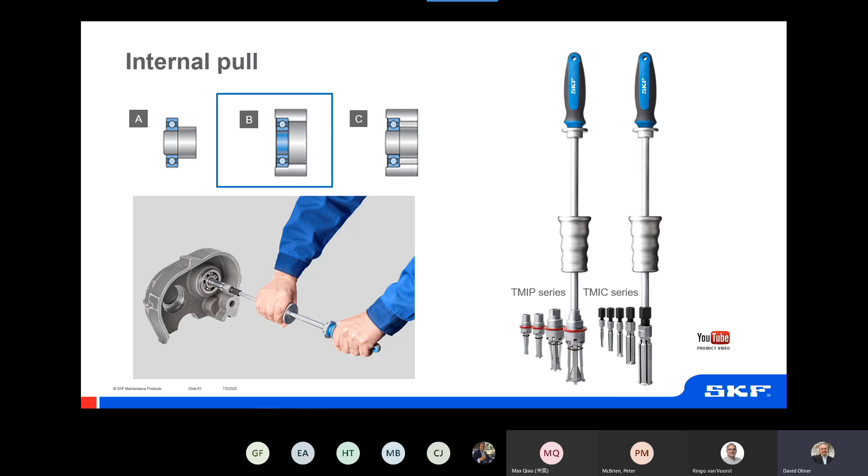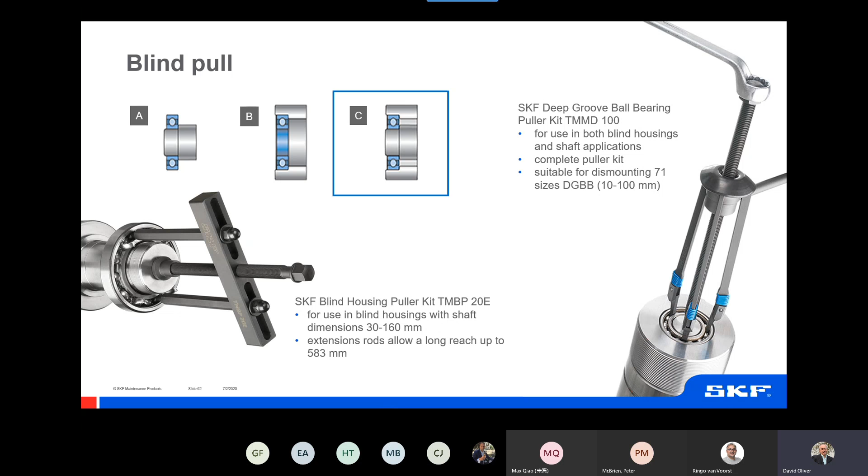And if the bearing is completely blind, there are kits whereby, on the right hand side here, you can offer the legs of the kit up to fit into the groove of standard bearings, and then pull against the groove in a deep groove ball bearing. If you require a longer reach or a greater force, and you can remove parts of the cage, the puller to the left-hand side enables you to do that over a longer extension and apply more force to the bearing as well. So a range of different kits, even for blind hole pullers.

So in conclusion, I hope that's given you a good insight into the life cycle of a bearing, and how to maximise it, enabling you to reduce costs and improve efficiencies in your plant.

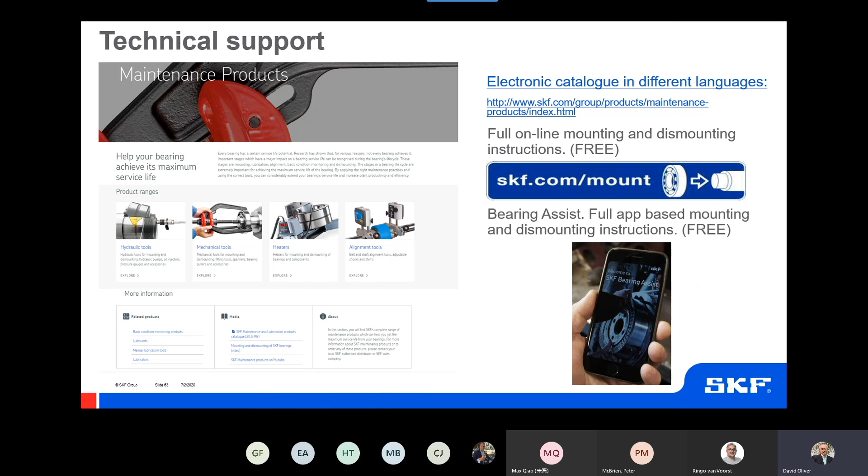Okay, thank you very much, Dave. Yes, really happy with this presentation.

Thank you for that. And I have one question coming from Matthew, who asks something about the oil monitoring device you have. Is this for a particular oil type, or can it be used for all types, gearbox oil, hydraulic oils, etc.? Yeah, that's a good question, and it can be used for all types because it's a comparative device.

So with the device, what would happen? You would put a new oil sample into the reception point. You would then calibrate the instrument against that new sample, clean it, put a used oil sample in. It would give you a comparative condition between used and new. So pretty well any oil can be used and compared using that particular device.

Okay, thank you. How much grease should be applied as adequate? So that's a very difficult question, and one where we probably need to have a bit of an understanding of the operating conditions that the bearing's running under. But just as a bit of a guide, the bearing itself should always be completely filled with grease. It's very, very important to get lubricant to every contact point within the bearing as early in its rotational life as possible.

And the bearing, by its very nature, as it starts to rotate, will purge grease from its internal area. So it will push grease out of the bearing relatively quickly. So the bearing itself should normally on the mounting process be filled with grease. But what is really key is the amount of grease that you put around the bearing. For very slow rotating applications, you can quite often sort of 2/3, even completely fill the housing space around the bearing.